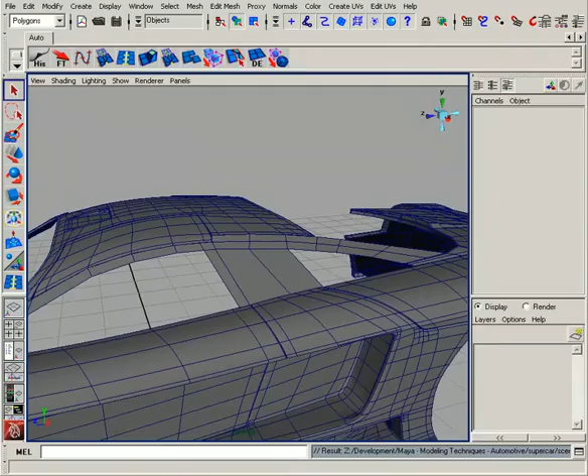Now let's go in and add some resolution and some thickness to the pieces of the side of the door that we've just added. We've got these five pieces here, and we need to go in on all these pieces and, where appropriate, add that sub-D resolution and a little bit of thickness as well.

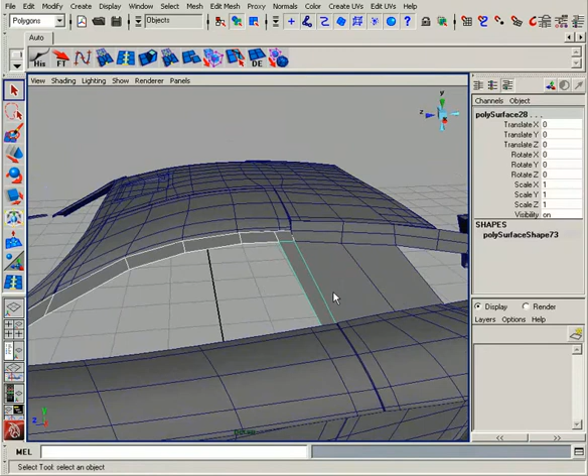We also need to connect up these two pieces, as they'll be one piece as part of the door. So before adding the resolution, let's connect these. I'm going to take both pieces and go Mesh, Combine. They're combined, but the vertices still aren't merged, so I'll select both of these vertices and merge them together. Then I can grab one and drag it to check that it's done.

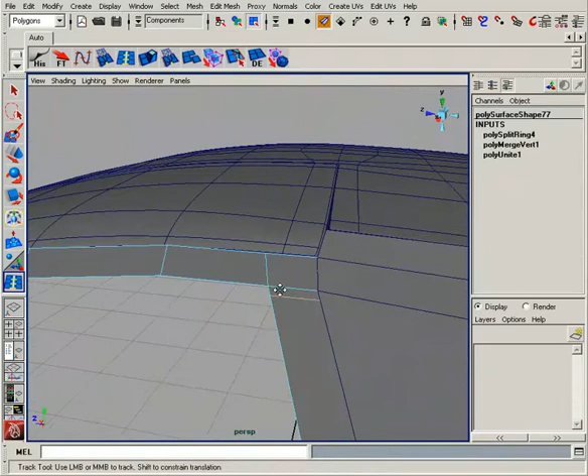Now I know I want this to be a sharp angle, so I'm going to add an edge right here and see how that works. I'm going to add a little bit of resolution right along here, and then add one right down here.

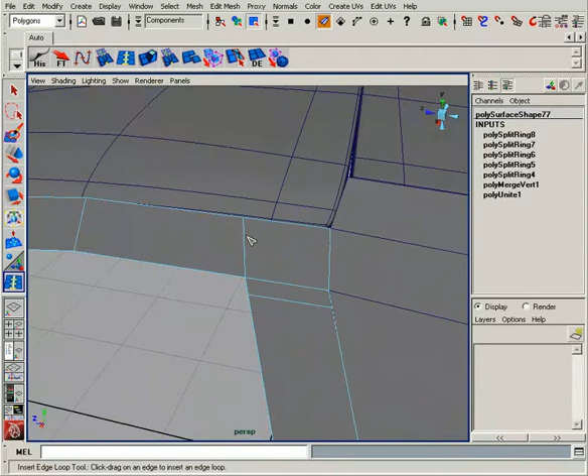Basically the same places that we've been adding that resolution on the rest of our pieces. So we're adding one up here, along the back, and right here. Let me go ahead and delete the history on this guy.

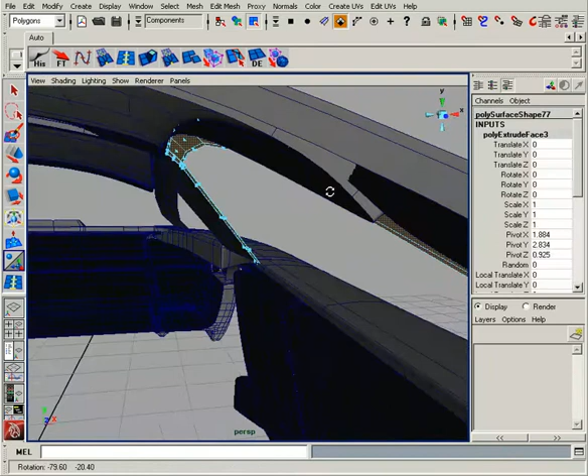Now I can just select those faces and extrude those in. Just one little extrude, then repeat that, and one a little bit more. Then I'll delete those faces and reverse those normals.

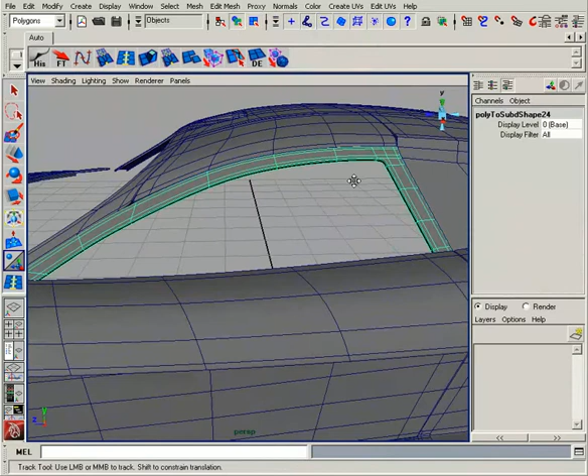Now if I sub-D this and check it out, you can see this is the kind of curve you're getting up here in this corner. If you want it to be a little bit sharper, you could go in and add another line right about here. I think it's going to be okay for us, so I'll just leave that.

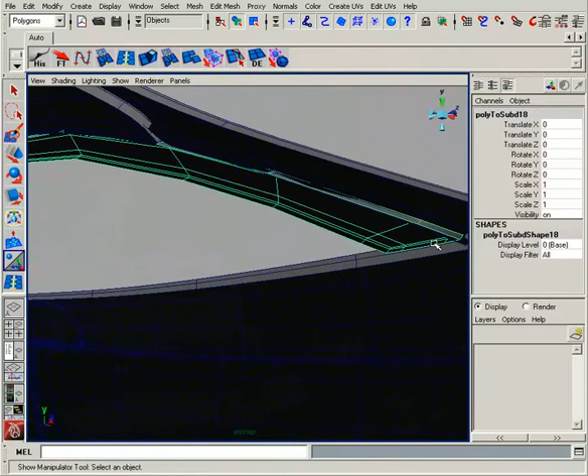Another thing you want to check out is these faces down here. You can see on the A pillar right here that we've gotten rid of these faces at the bottom, because that's just going to be sticking right in there and we don't need those. It's just going to create extra geometry needed to get those to be sharp, so you can just cut those faces off, and we can do the same thing here if we want to.

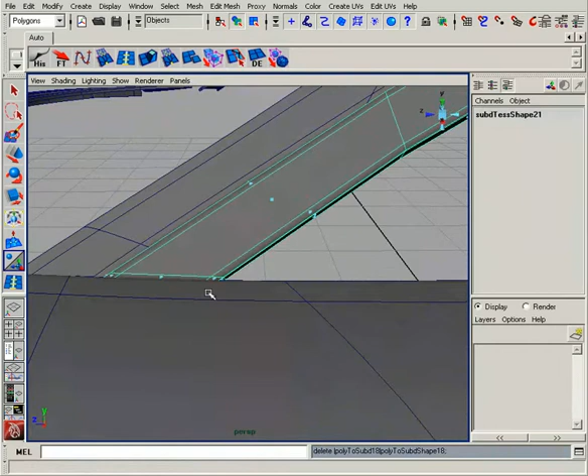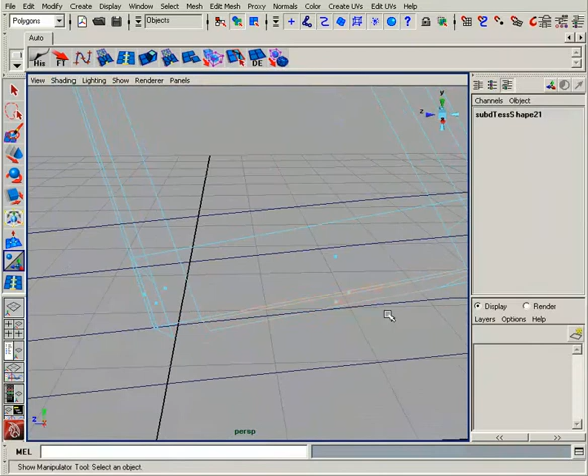Just get rid of those faces right there, and we can do the same thing at the bottom of this guy right down here. Just get rid of those faces, since that's just intersecting right in there.

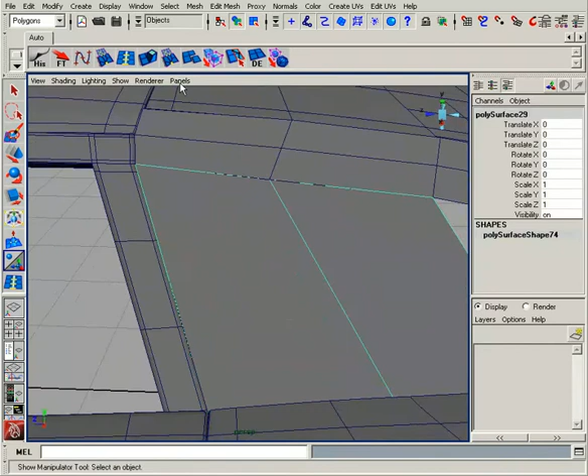Now let's move back and take a look at this guy. At this point we just need to add some resolution. We're going to be adding a little detail piece inside here, but for now let's just add the resolution needed to smooth this out. I'm going to add one up here, basically one on every side.

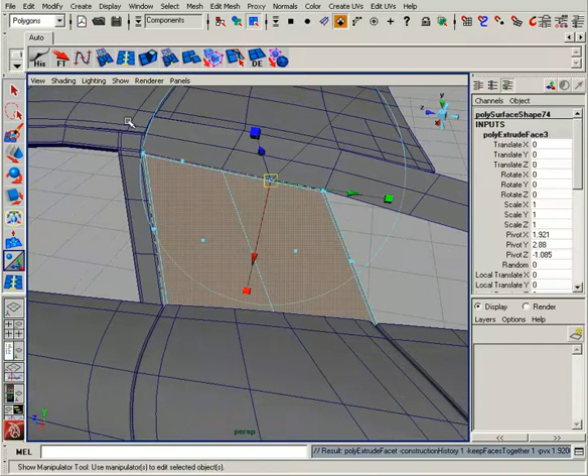Then I'll just grab those faces and extrude those in. Repeat that extrude, extrude them in. Delete those faces, then reverse that, and we can check that out. Smooth it out. It's looking pretty good.

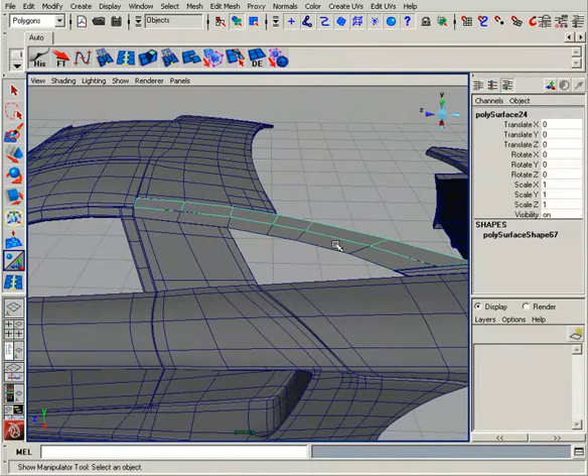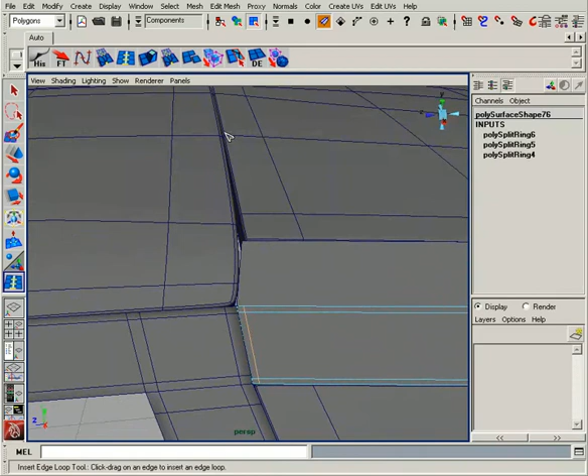And now we just have these two pieces to worry about. I'm just going to repeat that process, adding that resolution where we want it. We don't want to have things intersecting, so that's why we're doing all this sub-D work, to get these little places where these cuts meet. We want to be able to see that there is actually something meeting together, and it's not just intersecting with each other.

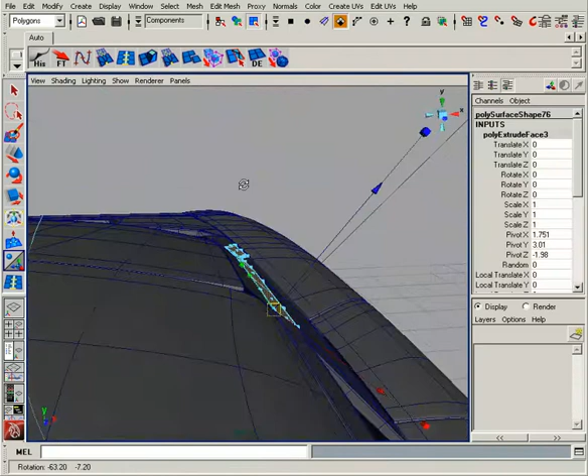Go ahead and add that, then delete history, and I'm just going to extrude those in, once and twice. Delete those faces, reverse that. And then we just have one more. Let me go ahead and smooth this out a little bit.

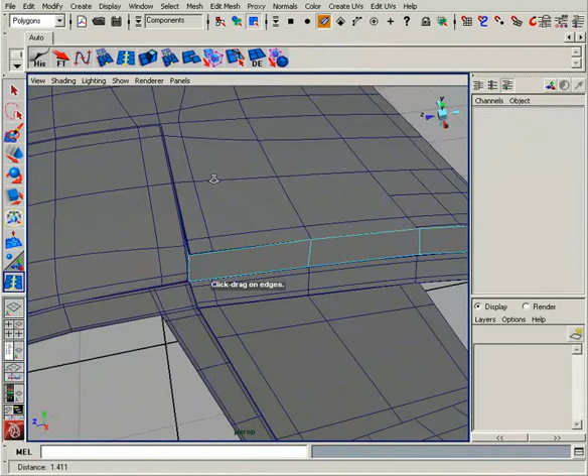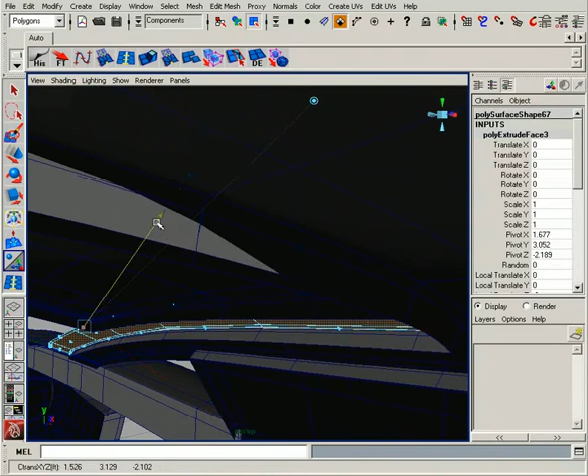Looks like we just have one more to take care of. So again, I'm just going to insert an edge loop to add this resolution, right along here. Then I'll extrude that, a little bit less, then repeat that, extrude down, and reverse that. Delete that history. Alright, so now we've got some thickness added to all of our side window pieces here.

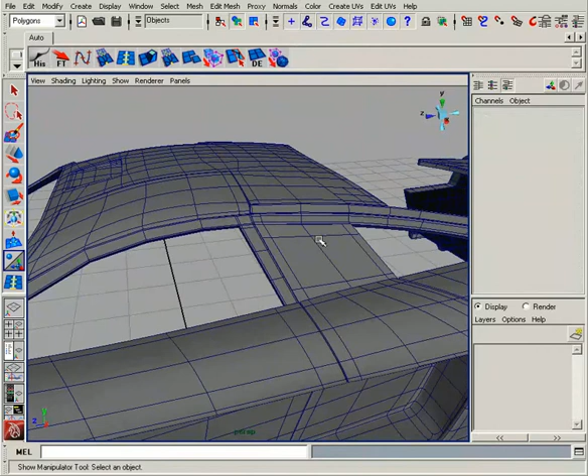So in the next lesson we're going to go in and use some of the curves that we still have hanging around to actually build the window pane geometry that's going to fill this part in right along here.